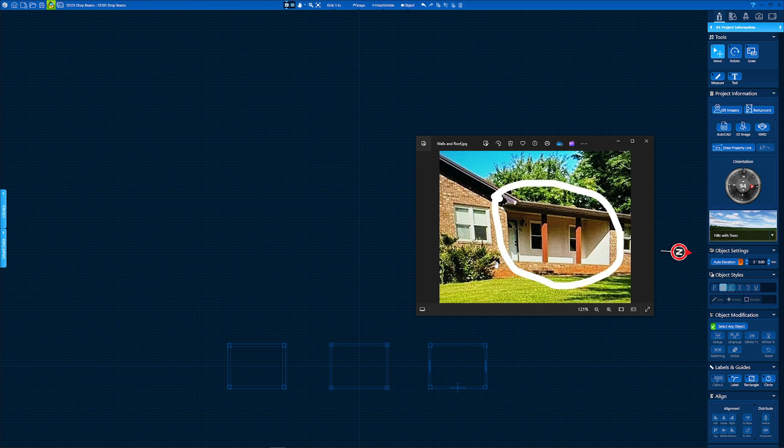So let's get started with this really quick, and I'll show you how to do this right now.

All right, first things first, we're going to set our grid up on a 1-inch grid for accuracy, always. Anything greater than 1 inch, you're really doing yourself a disservice and just creating more frustration for yourself. Our snaps are going to be set up since we're drawing straight lines in grid, relative angle, the L shortcut key, and autocomplete, which on mine is always on. If I'm drawing a house, everything's straight lines, so this is the only snap menu that I'm going to need. So we've got all that set up.

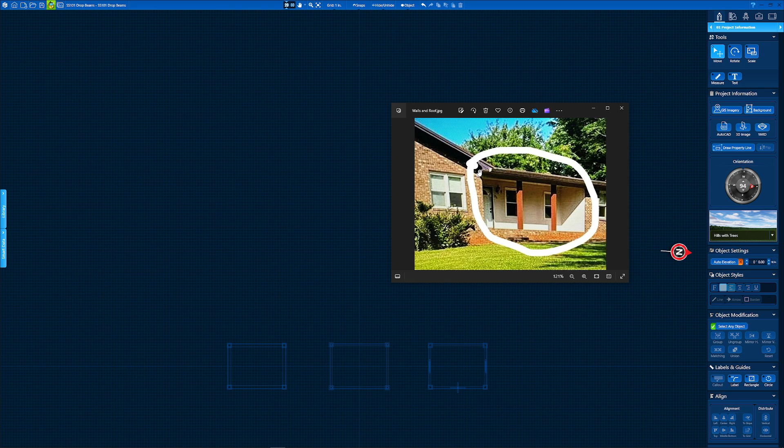So this is the only image that we have, so we're just going to make it up. Let's just say this is maybe 12, 7, 18. This might come out a little bit, so we're going to go 8 there. All right, let's do this. We're going to start here, go into the house stage, get started here, and zoom in on a spot. This is one of my other tutorials that I did.

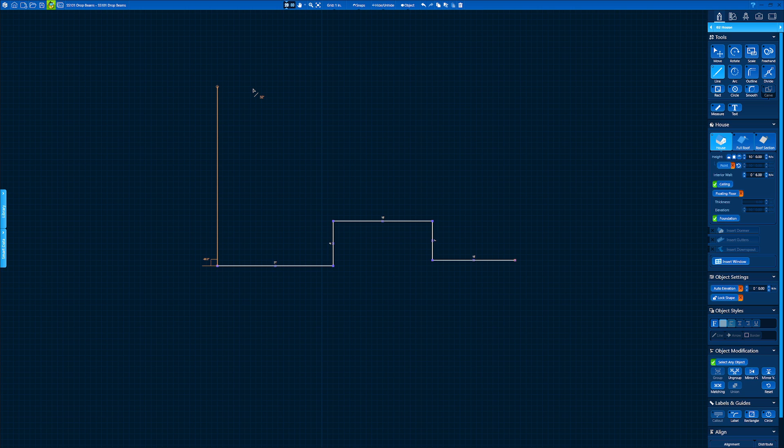A is the shortcut key for line, and we're going to start with, let's go 15. Type in 15, we're going to drop back 7, go over 18, let's go 8 on here. We're going to go over, let's say that gable's 21 feet, and this house is 40. And autocomplete: when you see the dotted dashed yellow line, just hit enter. Hit enter twice and it'll complete it for you.

So what you're looking at here is Structure Studios will, by default, add a roof to your walls. That's not what we want to do, because as you see, the porch notches back and there's a shot straight across to this gable here.

So this is why separating your roof from your walls is critical, even on a simple single story house like this. You don't have to overcomplicate it. Just always think separate roof from walls and then you're good to go. You'll be building these houses much faster, much more efficiently, and much more accurate if you think along those scales. So don't overcomplicate it, you're going to be okay.

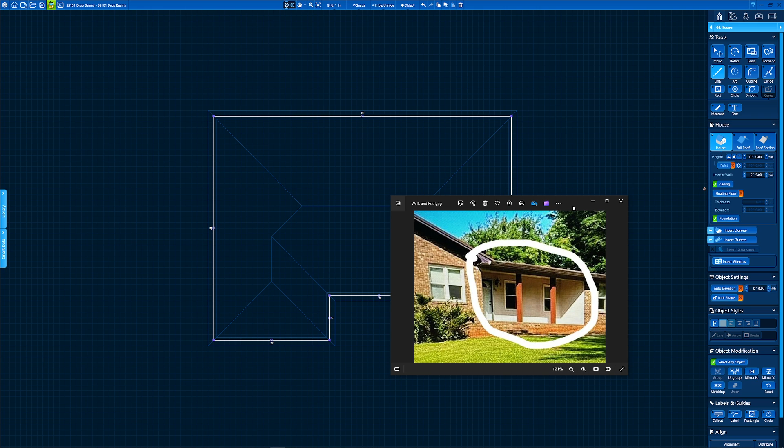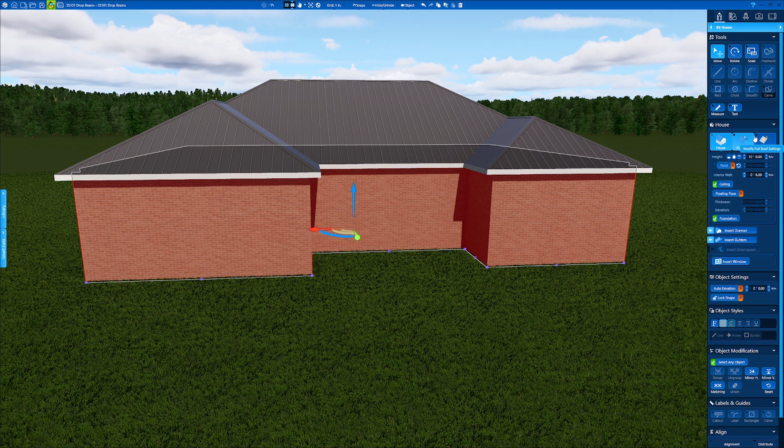So what I'm going to do is, if you go into the house stage, let's look at 3D here. This is what it's going to be. Obviously it's not correct, so what we're going to do is go into the house stage. I'm going to go to full roof, this tab here, modify full roof setting. Click that - notice a roof line will be checked. I'm going to uncheck that.

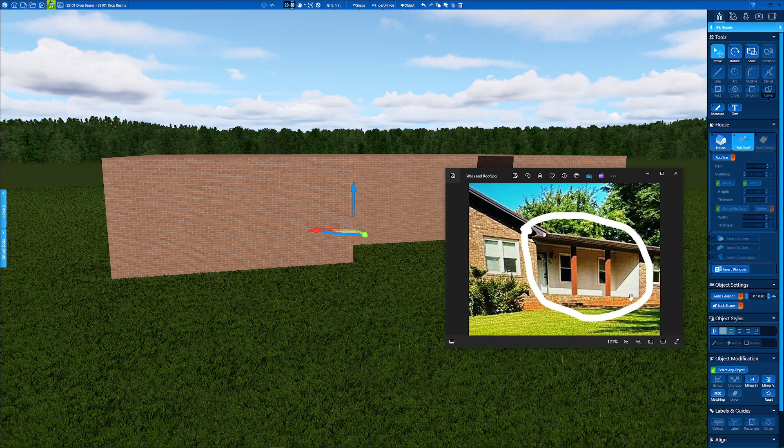In this house it looks like maybe a 24-inch porch that you step up, like 4 steps or something maybe. I can't really tell. We're going to make this 24 inches. So if these are 8-foot walls, 9, 10 - we're going to keep this at a 10 plate. And then we're going to put a 24-inch porch on this guy here.

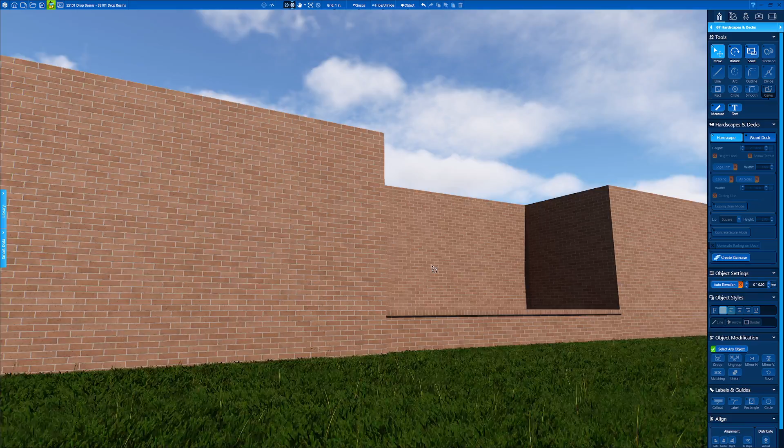Again, we're going to be working from the bottom up, and we're going to be working from the walls. So I'm going to go into hardscapes and decks, go back into 2D, just zoom in on a corner. For line, go here. I'm going to click D, shortcut key for the outline tool. I'm going to drag this all the way over just like this. Click that, and we're going to set this at 24 inches. So there we go, now we have our porch set up.

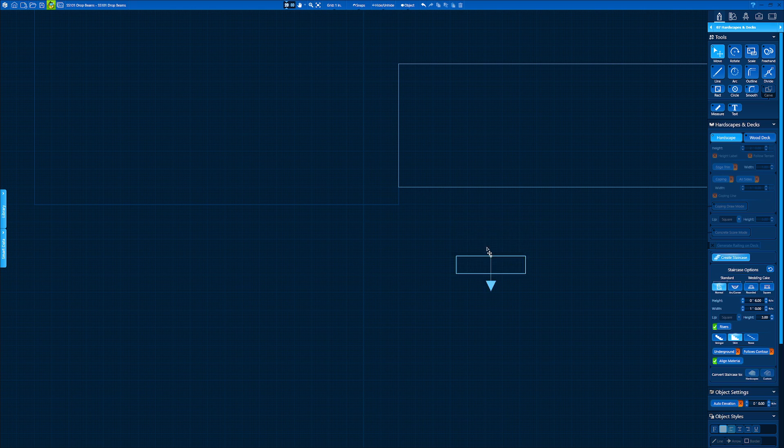And then you can add in your steps. I can't really see any steps, so maybe they're longer steps, I can't really tell from that image. So what I do a lot is create staircase - let's put a stairwell here. It's going to give us our 3 steps, we're going to come across. Let's make these steps like 6 feet.

Now watch this - so it's going to default with a 3-inch cap on a square like this right here. So our grass is pretty deep, that's why this doesn't give a full 6.

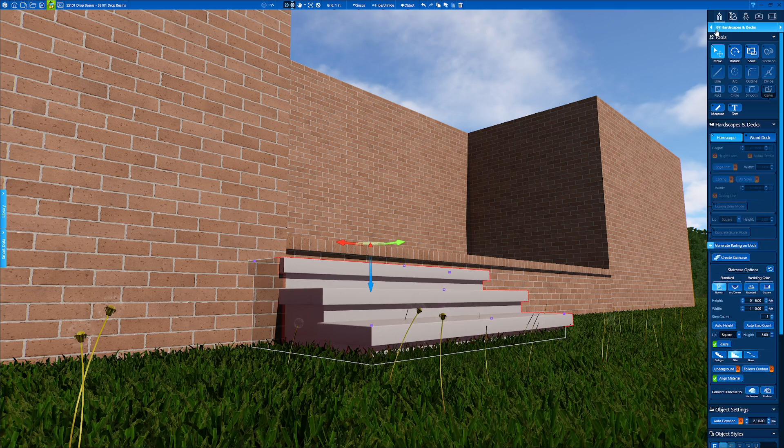So what I always do is, if you go to change the materials, let's just say we wanted all this to be brick. So it's going to highlight everything, be brick. Click the sides, brick, click here on the top, brick.

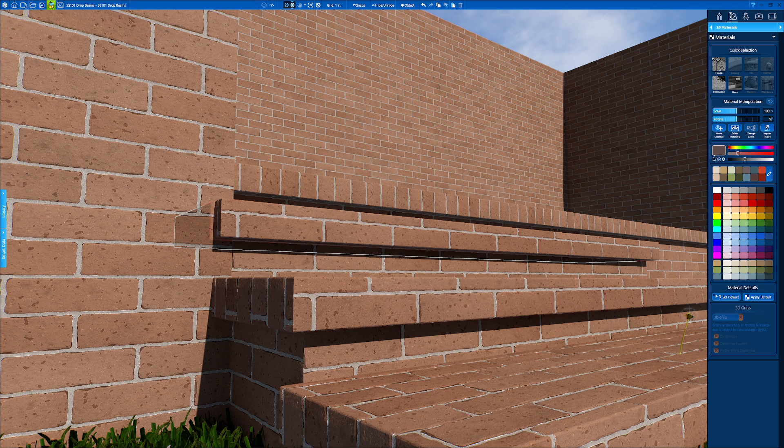And there we go. So what I like to do for my - you see this top soldier course here, see how it's nice and straight? So on your treads or your lips, turn them 90 degrees. Whoops. 90 degrees, let's see what just happened there. That's weird, so 90 - there we go.

So if you notice that it's not always going to be perfectly accurate here, you see these brick seams. This is a very simple fix - all we're going to do is grab our move material, our little hand right here, our pan selected material tool. Click that, and then we're just going to draw. See that? See how nice and clean that looks? So you don't have this weird grout line seam.

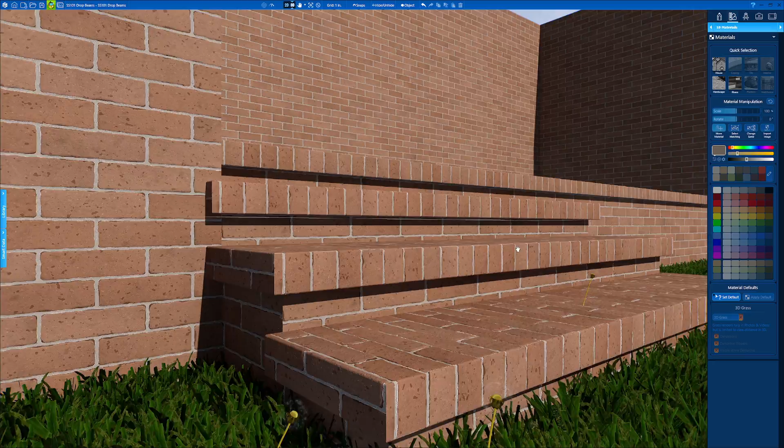So it's these little details like this that really give you the realistic look that everybody's looking for. It's not presentation settings, because the render quality of this program is at the top - it's these little tiny details like this right here. So just always make sure that you keep that in mind when you are working with this program.

So if you notice right here also, see how the program is just not going to put the material together properly. So when you adjust materials, you need to always look at these little things like this, because you might overlook them - these little details might not be that important to you, but clients will see this, and in my opinion these little things kind of say, well, he's not really that keen on details.

And I've been called out on this back in my early days of Structure Studios use. The client was like, oh, look at my brick, and I was like, oh - kind of made me feel like an idiot. So I just started paying attention to that.

So what I'm going to do - you see this line here, this is hardscapes and decks. I'm going to double click this line. I'm going to use my pan material again, and I'm just going to find that.

You can see that it's not 100% right. What I like to do is look for patterns in the brick, so I'll just scroll through here. I'm looking for this pattern right here, this little dot. And we're just going to keep scrolling. There it is, right there. So now I know this is on this course here, this brick. And so I'm just going to find out.

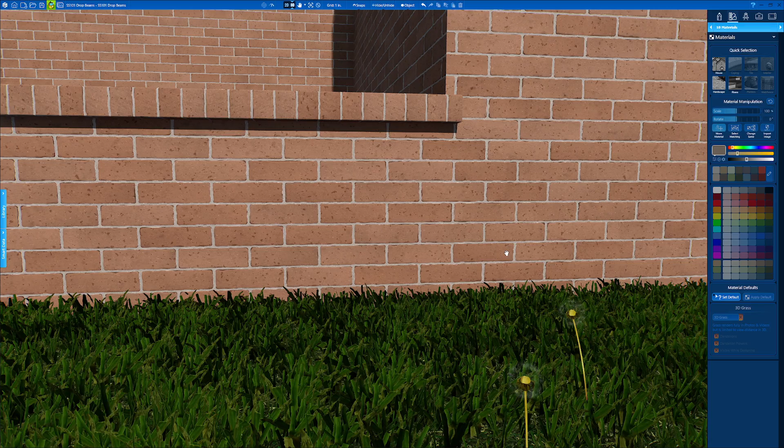Watch that line disappear. See that? And it just disappears. So now you have a nice seamless transition to the house, and it's not all weird. You're not going to get called out. Now, if you do all change same or something like that, this is going to change again.

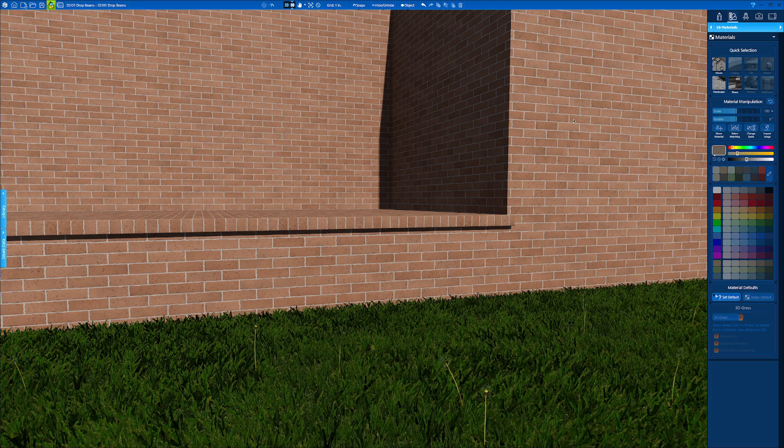So when I talk about manipulating materials, this is the material manipulation that I'm talking about. Just making sure that everything's lined up, especially on shingles, like when we get up on the roof, you got a really complex roof line. You're going to have to match up those shingles so you don't see the different sections in your 3D model.

Especially if you're charging any type of money to build models, if you're at that advanced stage and you're not paying attention to these little details, and you ship your model out, or you're doing renderings for someone, that's just not a good look. Take a little more pride in your work. Put in a little bit more effort. Take the extra 15, 20 seconds to adjust your materials.

Make sure everything's nice and smooth. So when you take that photo or you're posting to social media, everything's in place and everything's where it should be. So always just put in just that little bit of effort, just a little bit of time that's going to make your stuff stand out and be better than everybody else's.

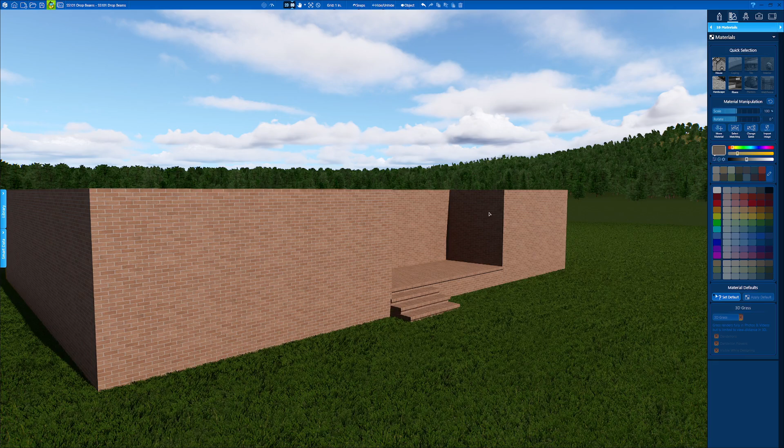So it's not like it's going to take you an hour to move that material around. Just move it around. Take some pride in your work. Put in some more effort. Look for these little things like this, and it doesn't take long to fix. So, a quick tip on material manipulation for you.

It also works like on the copy paste stuff. So if you're copying and pasting from the material stage and you made all these material adjustments, that's what I'm talking about for the materials. If I did this and copied and pasted into some other face, all the materials are going to be out of whack again.

So if you have tons of material manipulations like that brick right there, or the roof shingles, or column posts, or wood grains, or anything like that, Structure Studios is not going to retain all that information. You're going to have to go back and do all that again if you don't copy paste from the proper stage. So just to give you a little heads up on that.

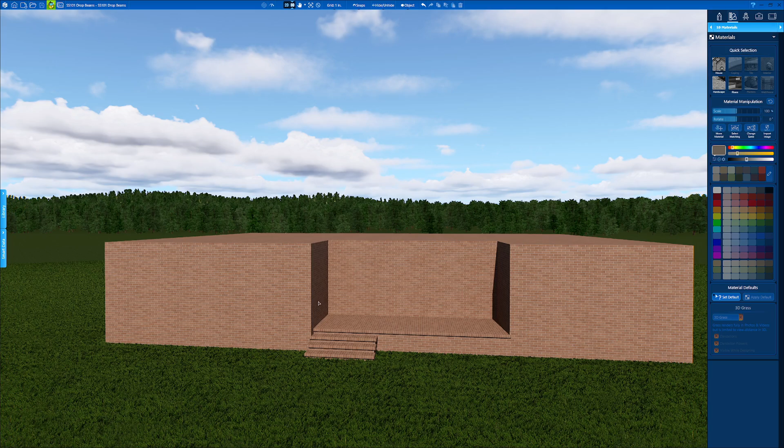We've had that discussion before. That's the reason I do not copy paste from the material stage or from the project information stage. I do a lot of material manipulation. That's what I'm talking about, a lot.

So you got a big house, man, you've matched up materials, everything's perfect. Window sills and headers or 90-degree angles on it, and then you copy paste from the wrong... all that's on large houses, 25,000 square feet. I mean, like big giant houses, large properties.

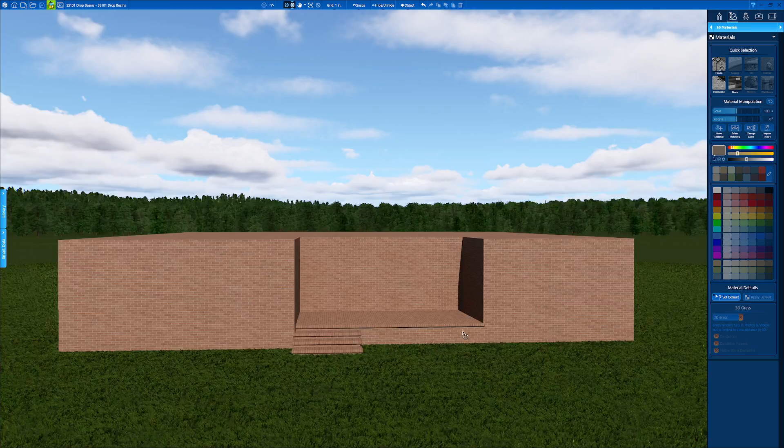There's a lot of material manipulation going on, and it does, when you get on a big giant property like that, I mean, I'll probably spend a good solid 45 minutes just adjusting materials, just to get all that, exactly, just like we did the brick here, to get everything perfect so you don't see those seams where all the pieces come together. So if you've seen any of my work, everything's, you're just like, well how's that one piece? Well, it's not one piece.

It's probably 4 pieces, but I spend the time to adjust my materials where it all looks seamless. So just a quick tip for you there.

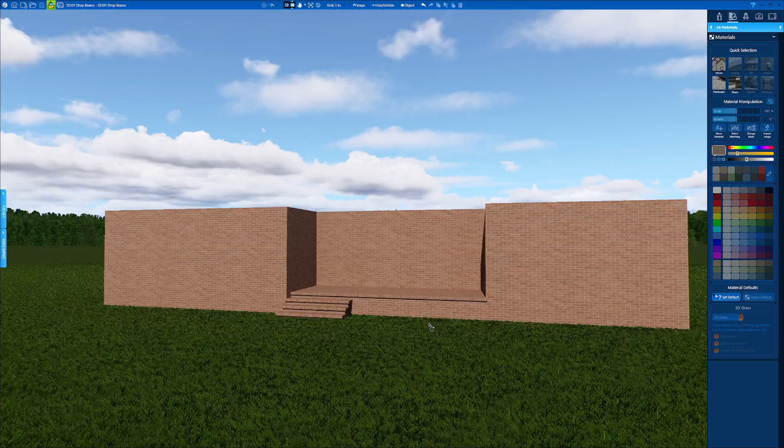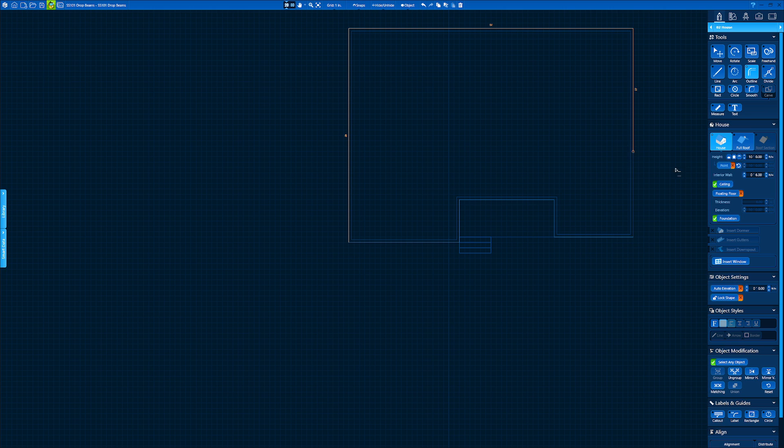Let's get back to this, back to the house stage. So this guy here, and we're going to add this roof. What I'm going to do is hit the shortcut key for the outline tool. I usually get on a corner on the outside and snap it, then go around this way, stop right here, click and end that line. I'll pick it back up from there while it's still highlighted.

A for my line tool again. I'm going to go right back over to here, click, and then it's going to show the blue dash line, and I can just hit enter for autocomplete. So now since it retained this last bit of information right here, I've got 2 blocks that are the same.

So if you go into your house stage, on your height you have single story, which is default 10. Always be mindful of your plate height. This one right here is an 8, but it's a plus 2 for the porch. Plate heights are very important, especially if you're attaching structures to it.

If you don't change your plate height—let's just say it's an older home just like this, it has an 8-foot plate height, and then you attach a structure to it and it's 10 feet, and then you go to price your 10-foot structure and it's really only 8, that's going to add a lot more cost to the overall build.

So plate heights are very important. Don't just assume it's 10 feet default and everything's 10 feet default. Be mindful and aware of your plate heights, especially if you're attaching arbors, cabanas, shingle roof structures, or porches to your house, because it's going to skew your numbers on your estimate. A couple thousand to three thousand dollars of extra material that you really don't need—because you had it as a 10 when it should have been an 8—could be the difference between losing the project and winning it. So always be accurate with your models and your designs, especially.

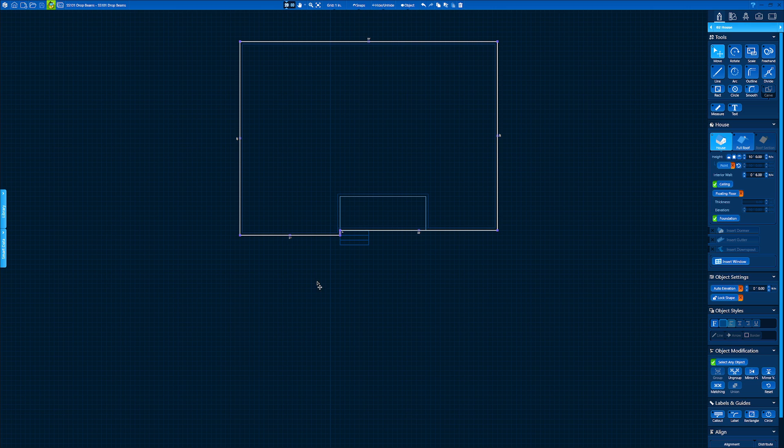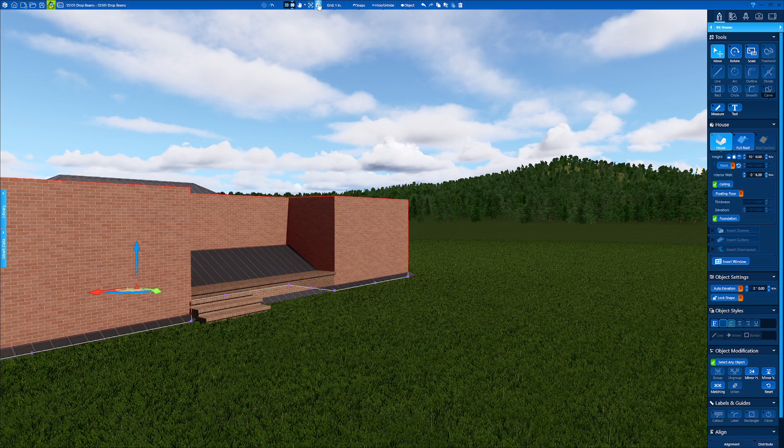So we're going to save this. Default height is 10, roof second story is 20. What we're going to be looking for is a set height of roof only, just like this. I know this is a 10 because we're up 2 and it's an 8 plate, so this is plus 2. This is a 10, so therefore my plate height here is 8. So I'm going to grab this and set it at 10. And there you have it.

So the open porch is notched out, it's in 2 pieces, walls plus roof. But if you notice, these older homes usually have low pitches—I've seen them as low as 3. These older homes, like 80s builds, have an 8-foot plate with like a 3 or 4 pitch. So we're going to play around with the pitch of this roof right here.

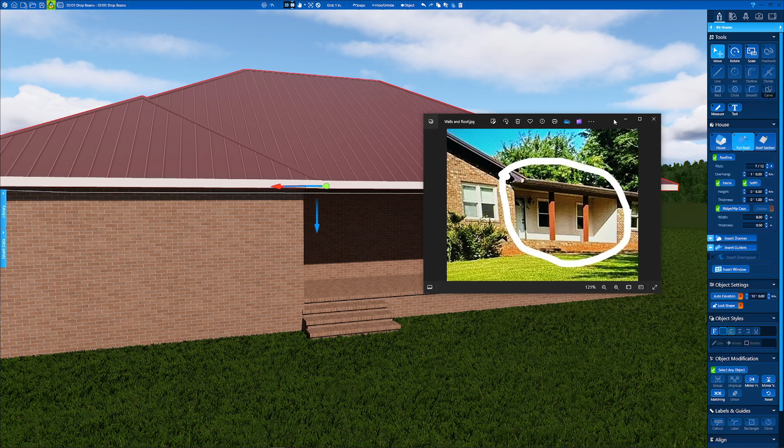While the roof is still highlighted, I'm just going to drop this down to like a 4. Then we're going to click and highlight—see the white highlight here? On this section, I'm going to go to my roof section and change this to gable. Oh no, look, there's a hole. What am I to do?

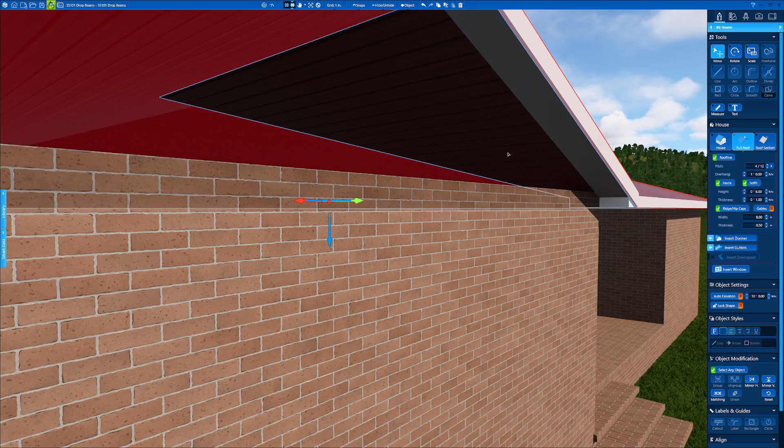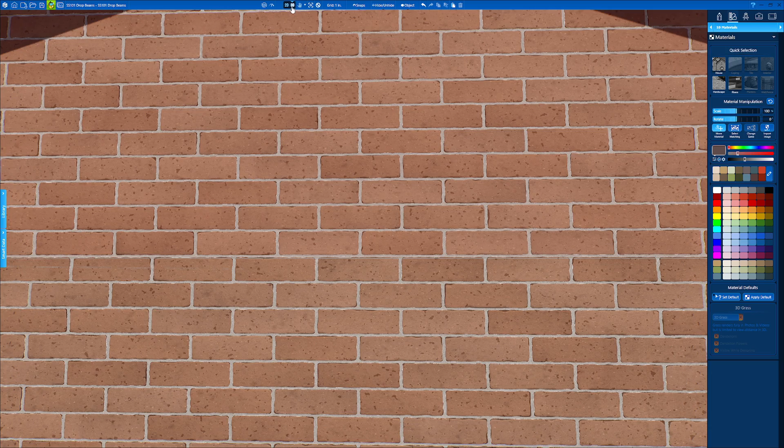House tab, add 1 inch, and there you have it. Oh man, but look at my brick—it's stacked. What am I going to do about that? Well, back in the material stage, you double click just this section here, and all I'm going to do is roll this over to the side to get that offset. So move material, and I'm going to come straight over just like this. Problem solved—it took 2 seconds to do that, and it doesn't look all weird and stuff.

So we're going to go back here. So I've got—what is this?

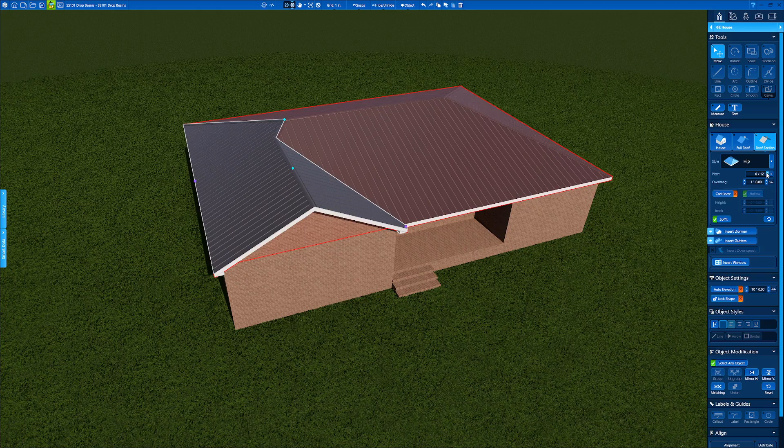I'm going to leave this like a 4 or a 3 in the center, but turn my sides up a little higher because I want my gable to be a 5. I'm going to leave this lower. If I wanted to change this and this, I would highlight this section with a white line highlight, hold control and click this section, so I can do these 2 sections and make it a 6. And there we go.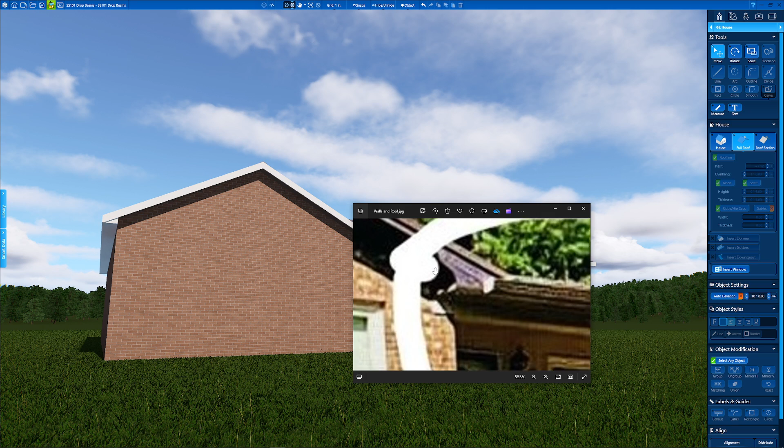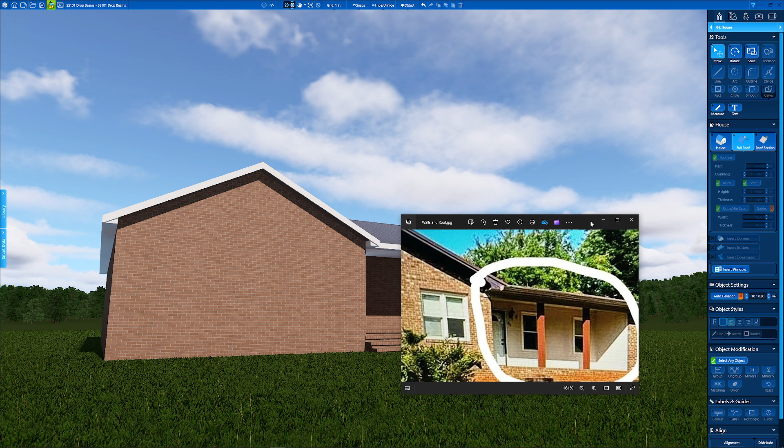If you wanted to do that detail on these older homes like this, these single stories, with me talking, the video is going 18 minutes so far. But if I'm just doing this, bang, bang, bang, I'm going to build this entire house in 15 minutes. But yeah, I'm doing a lot of talking.

Let's just do this little detail right here, and I'll show you some quick tips. In one of the updates, they did take out - see, they do a 1-inch notch back on the box soffits.

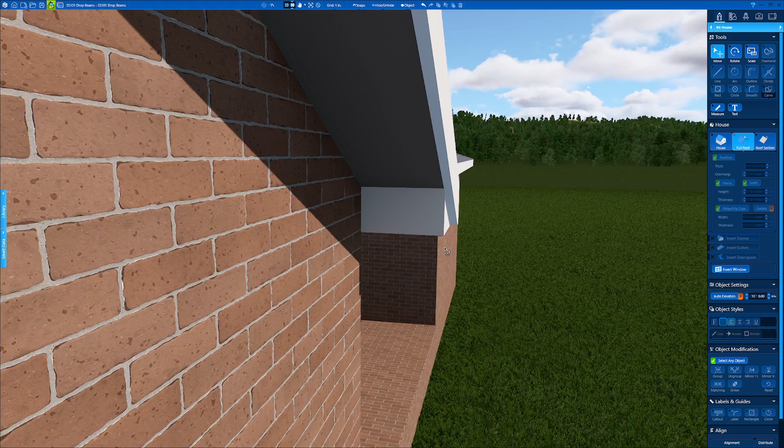In the cheaper homes, they will put the fascia right on top of the box, but in your more high-end homes, they're going to be more flush, like a flush box soffit. That's the way the program used to be, and then they changed it.

So what they need to do is make it where we can adjust the soffit to be flush, or if we wanted it recessed, we could do that too. But they need to change that. Let me see if... see, it still leaves a 1/2 inch or a 1/4 inch. Even when you do adjust, they won't let you go to 0.

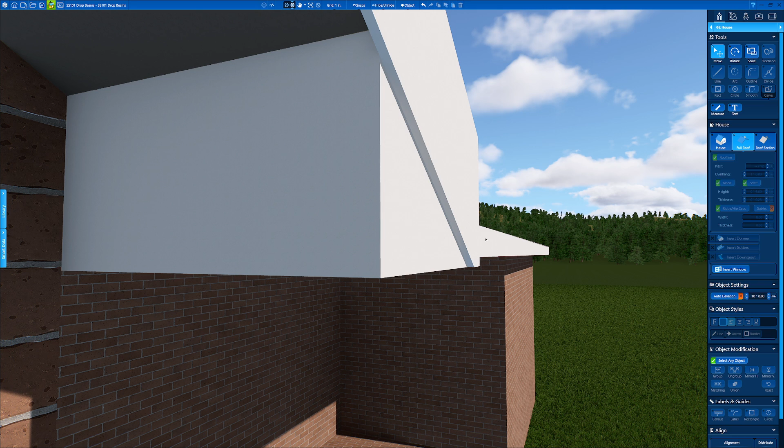That's what I'm talking about. You need to be able to turn this to 0. But you see, it changes the fascia. There's no controls for the soffit, it's just the fascia. Usually fascia is going to be 3/4 of an inch.

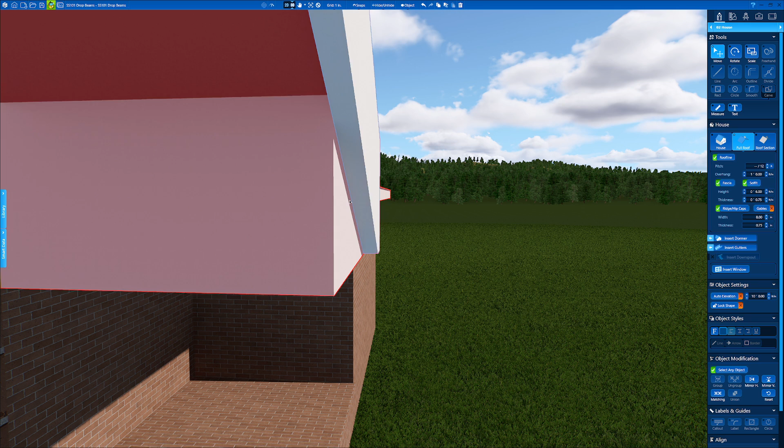Yeah, nothing, these are all ridge cap stuff. There needs to be a section for the soffit also, so that we can adjust this soffit. So if I wanted this flush, I could get the box soffits flush instead of having this weird notch back like this.

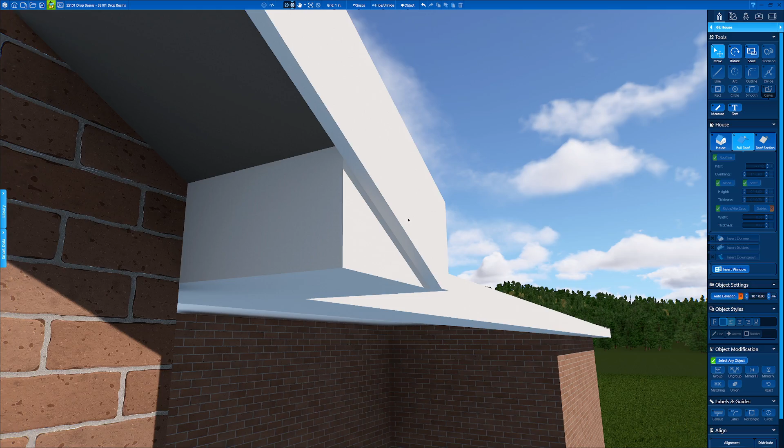For older homes, like cheaper, more of your development style homes, you're going to see the fascia over the box soffit because it's easier and cheaper to do it that way. It takes a little more skill to cut out the actual box soffit and then caulk and paint it. So a lot of the builders we have these days will do it like this. But on your higher end homes, you're gonna be more of a solid box soffit.

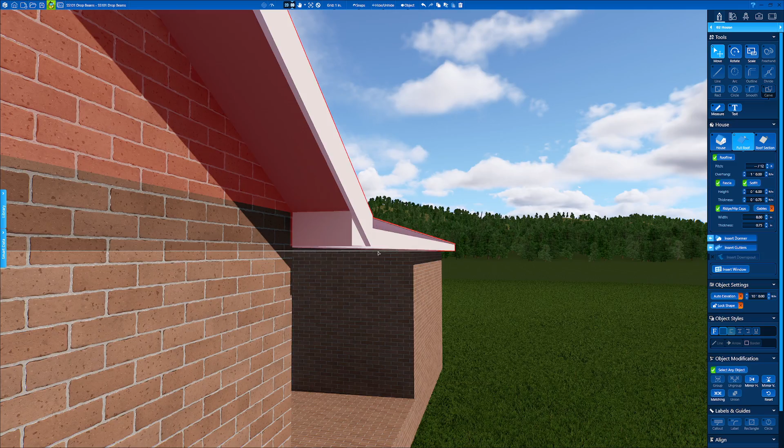So we need that option in the soffit. We have the fascia, we can adjust that - great. But we need to be able to adjust this soffit too. So Structure Studios, if you are watching, these are the things we need. We don't need more plants and birds and characters, we need performance upgrades like this.

So that is that. Let's go back in the material stage. We're gonna take this underside - Control C that material, Control V material there. Here we go. All right, let's get back to it here.

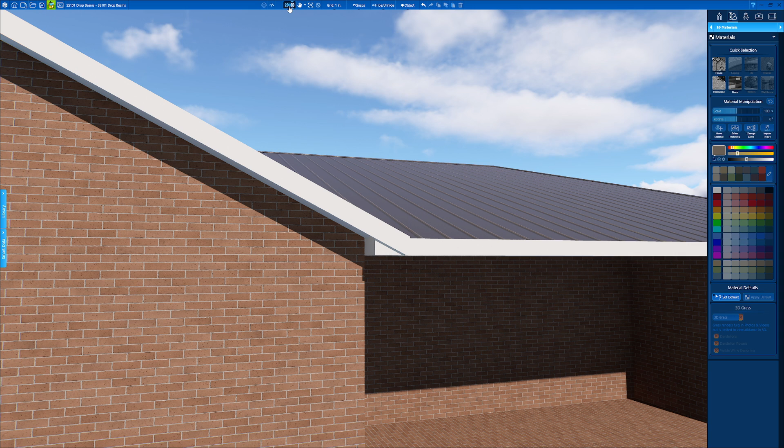I'm gonna build this out of custom shapes, and so we're gonna do this. I'm just gonna make this video, and it's a little more intricate here. I know this box soffit is 12s, so I'm gonna go 12, and then we're gonna do a little curve here.

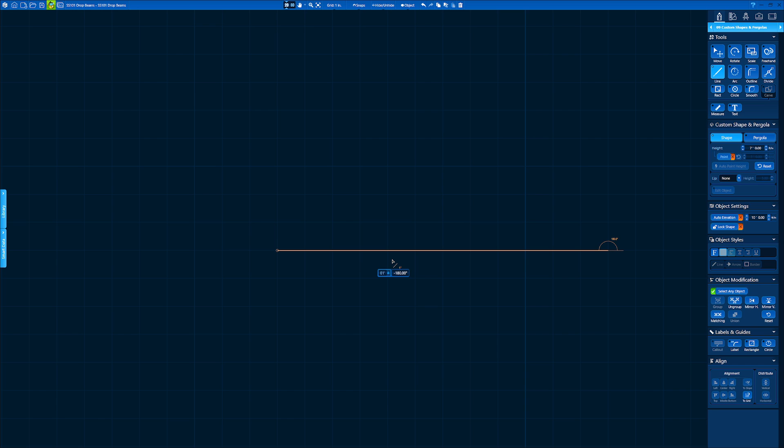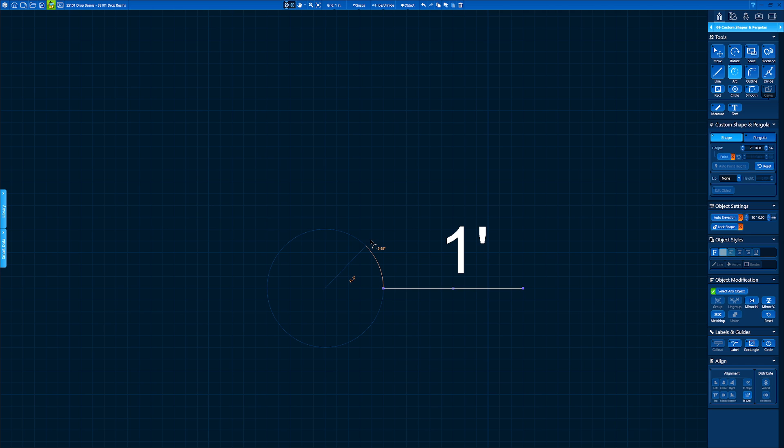In custom shapes, I'm gonna go one - oops, one - and then we're gonna do kind of almost like a recurve type of shape here. I'm gonna turn my relative angle off with the L shortcut key, so I can get a little more of something like this. It looks like it kind of straightens out, so let's do kind of like that.

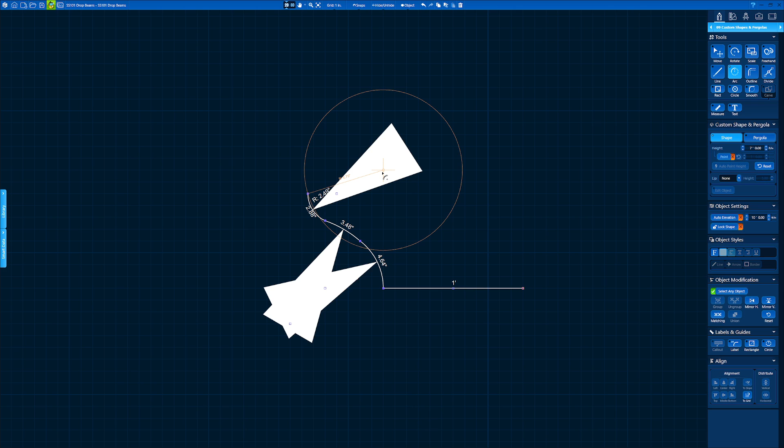I'm gonna roll it back up like this. Oh man, this is a mess. Look at this font - and you can't control the arrow size either for the curves, which is very frustrating. See, you get these gigantic arrows, you can't control the size of those things, man. It's just outrageous.

Whoever's making the decisions over there just needs to stop making decisions. So we're gonna go like this. It looks like a 5. I'm just gonna guess this angle here, and we're gonna go something like this right here. I'm gonna go that. You can turn all this off. It's what I usually do when I get down on detail stuff like this.

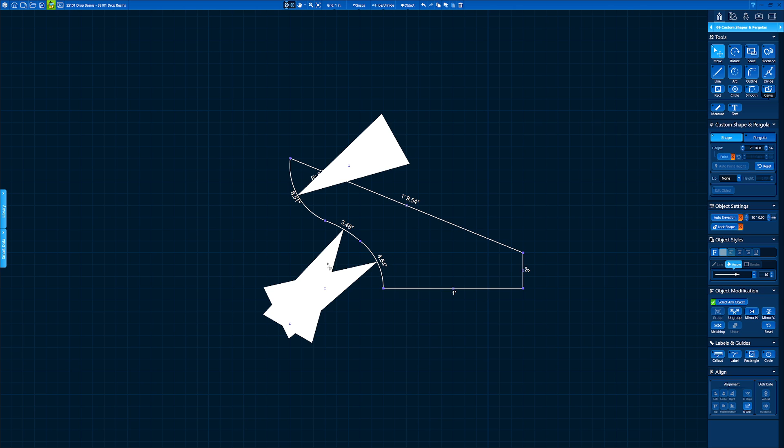Wait a minute, let's see. Oh, they did change it. They finally added that in there. Look at that, so hey, good on them. They must be watching my videos.

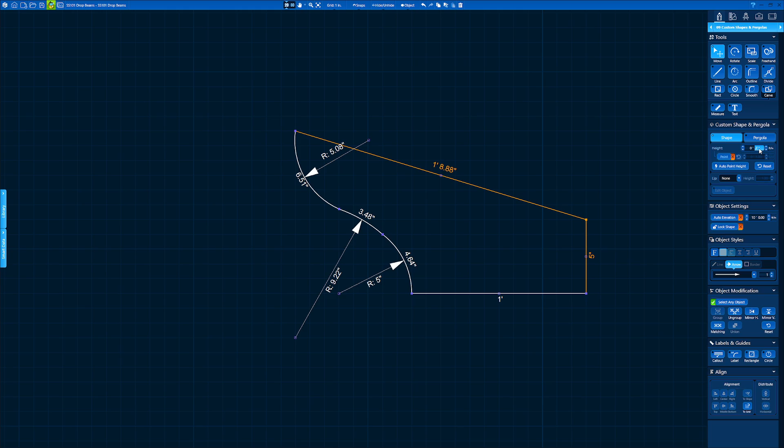So I'm going to go here. Let me see, maybe this is a little bit higher, 4 or 5 inches. Something like this. Make sure you change that. I think we're at 3/4 here, so we're going to go 0.75. And then we have our little piece, and it's in a different material color, so let's see.

Now we're going to double click this guy. Hit the W shortcut key to rotate. L to turn my relative angle back on, the L shortcut key, and I'm just going to bloop bloop, just like this. I almost got the pitch.

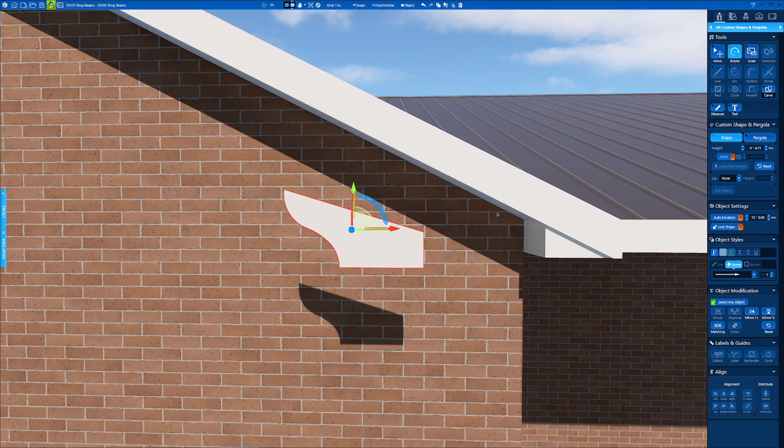Now I need to rotate this back down on my gizmo. This Y needs to be going back up, or Z. So I want to hit the W shortcut, and you see the blue box. Click that blue box, it's going to reset the orientation. So now I can drag this guy over here like this.

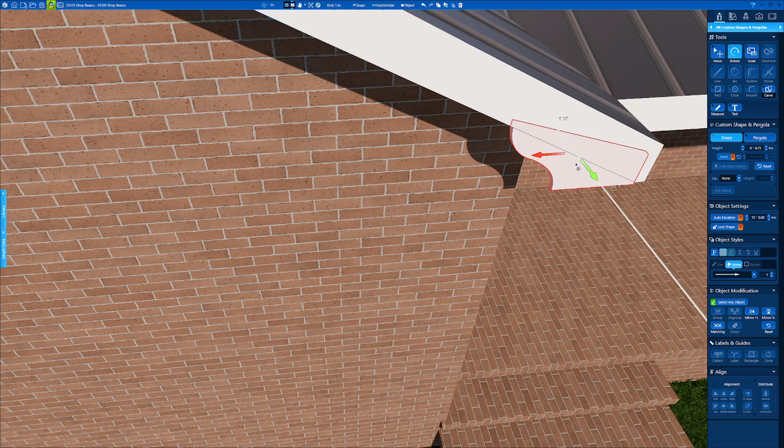And I'm going to snug this guy up just like that right there. And we're going to go. No, we're going to come down. I'm going to manually, there we go. There we go, so now you have that cool little

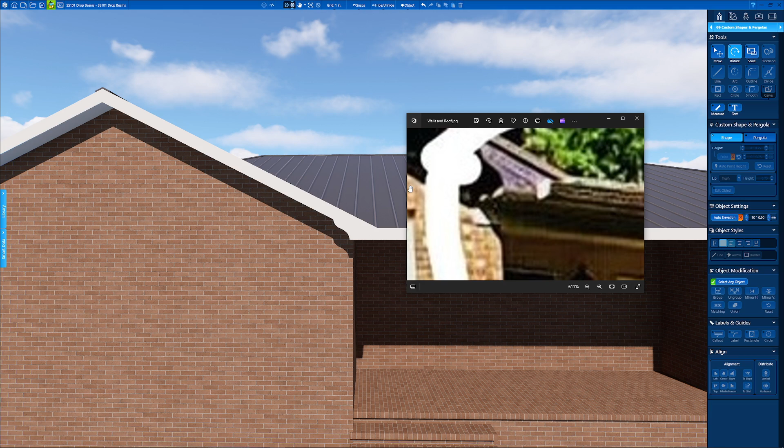detail, and these things, they don't take very long. So we have that, and if I want to take this guy, I want to go back and see how much I'm snapped. So I got to go to my hide unhide. I got to turn on my 2D roofing to make sure that my line is there. You see how I'm kind of off.

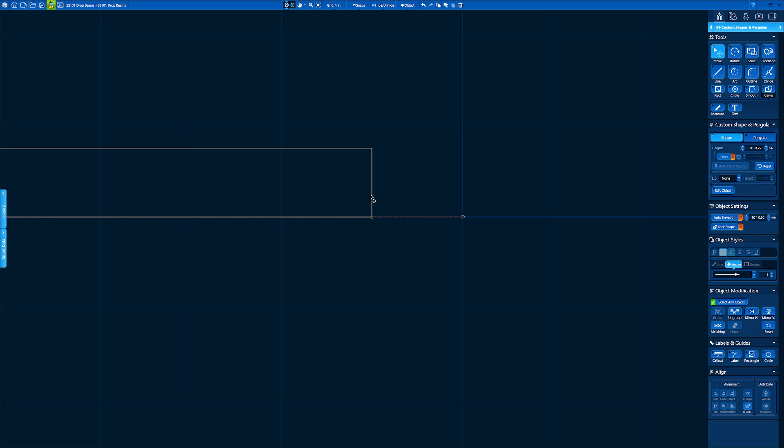So if I have my snaps on point and line, I'm going to turn my grid off, and then I'm going to try to snap it just like that. So now I'm completely flush, let me go 1 inch back. It's not going to snap. Look at that, oh, I got to turn my grid on. So turn my grid on.

And it's still not going to snap. So fun stuff, fun stuff. Yeah, we're just gonna just eyeball it. So 1 inch in.

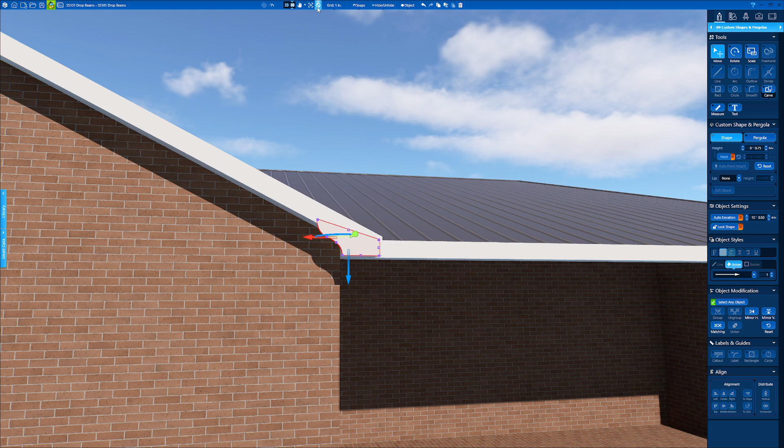So now I'm going to take this, I'm going to copy paste to the other side once you have that one built, and I'm going to drag it out here. And I'm going to use my mirror, I'm just going to click it. Watch this, boop, and now I'm just going to snap it 1 inch off the corner.

Hit the Q shortcut key or escape, whichever one, I usually use Q, and snaps. There we go. And we're back in business. Look at that, see, very fast.

Very simple. As long as you're using your snaps and your grid, that's the way the program was intended to be used, you're going to be okay, and you can do cool little things like this and make sure everything is nice and seamless, so you don't have those issues.

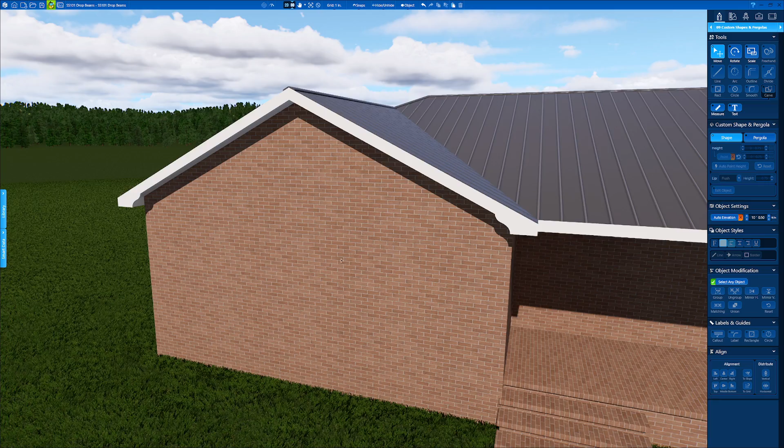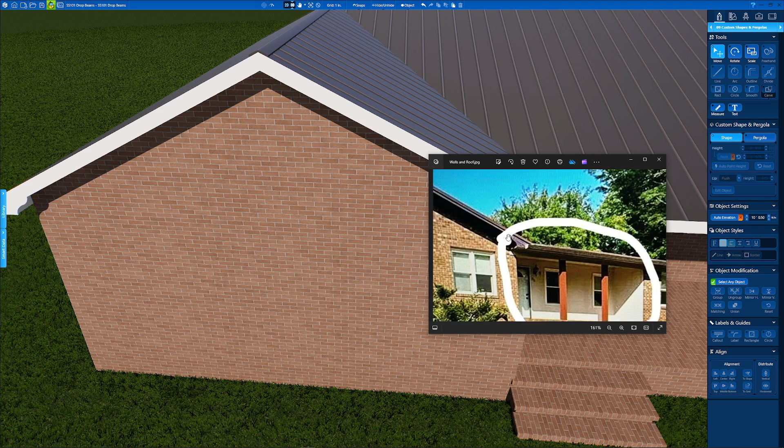But if you also notice, this is something else I've been trying to get Structure Studios to do, is drip edge. So we got the ridge cap, yeah, that's all fine and good, but we need this drip edge, and I'll show you that right here. So if you notice, it's a 2.5 inch drip edge. That's going to be on there, but we don't have that.

See, these little details like that, it really gives that the detail that you need. So yeah, that's what I'm trying to get them to do that. Just gives a little more detail, and looks a little more real.

I do a lot of house models for a lot of like custom home builders, and they do want things like really fast. Hey, my client really needs to see this house. I'm like, well, I'm not going to spend 3 days to build and model all the detail in SketchUp, so let me bang this out for you in Structure Studios in 3 hours. And these little things like this, like drip edge, would be huge to have in the house stage.

But most importantly for Structure Studios right now, the only thing they need to focus on is performance, because it's very, very slow and it's just continual lag and drag. It's very tough. So performance—let's get the performance up. It's like nothing else, we don't need anything else. Just focus on performance.

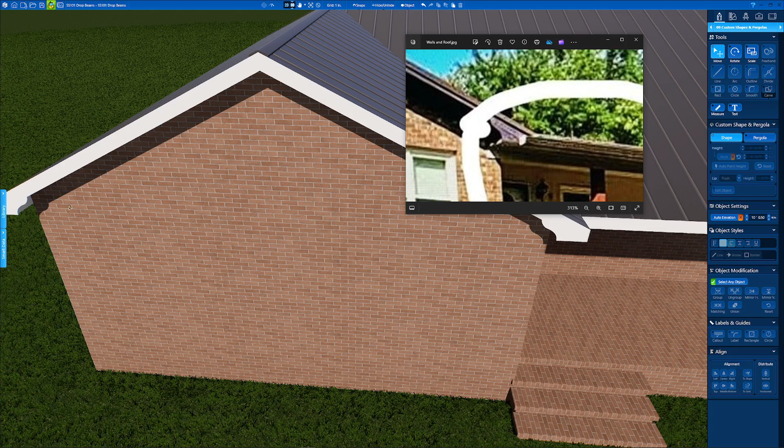So again, here's some little details for you guys very quickly on that. So that's pretty much it. We're going to get back to the house itself. Let's do some posts real quick.

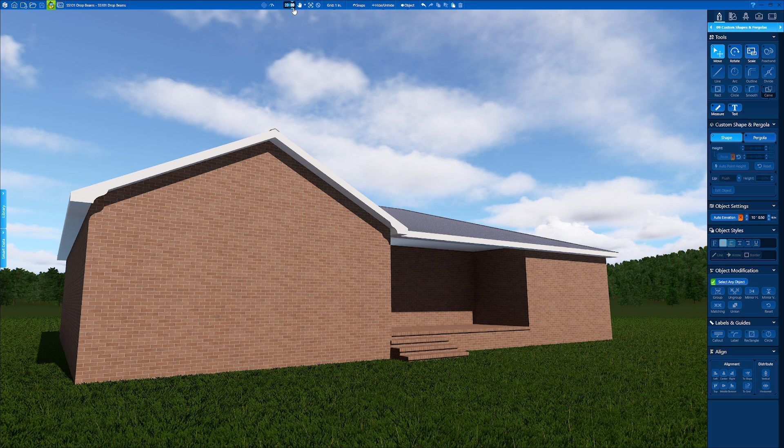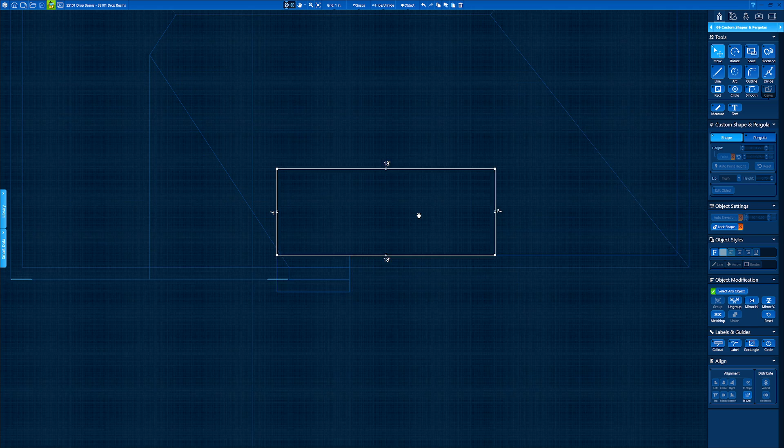So we're going to put a post here, 8x8. So we're up 10—remember, we're only up 2. So an 8-foot plate. I'm going to copy and paste another guy right over here, and we're just going to eyeball this. There we go.

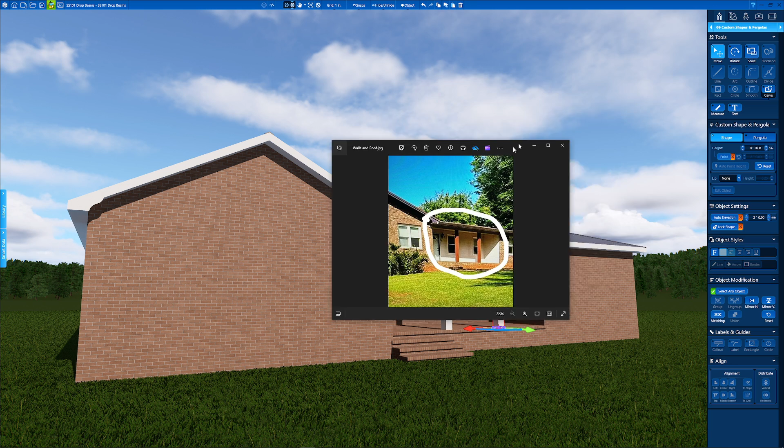So starting to take shape. Now we've got a drop beam here, and this is one of the other little details I'm talking about. It's not going to take long to do. But this drop beam here, this is not the way this house is going to be constructed in real life. There's a drop beam, so I'm going to do that in custom shapes also.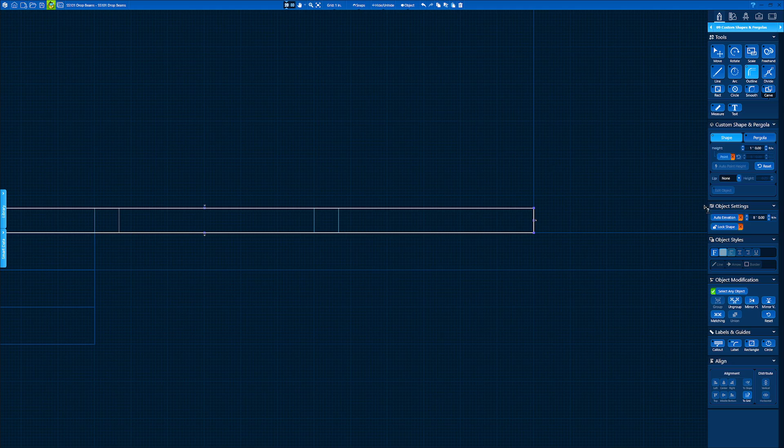Basically all you're going to do is get back on your porch line, go all the way across, click D, the shortcut key for the outline tool, click, and I'm going to set this to like a 1, set it to an 8. There we go, I'm going to go up. There we go, so we've got our drop beam. That little detail like that goes a long way when you're building.

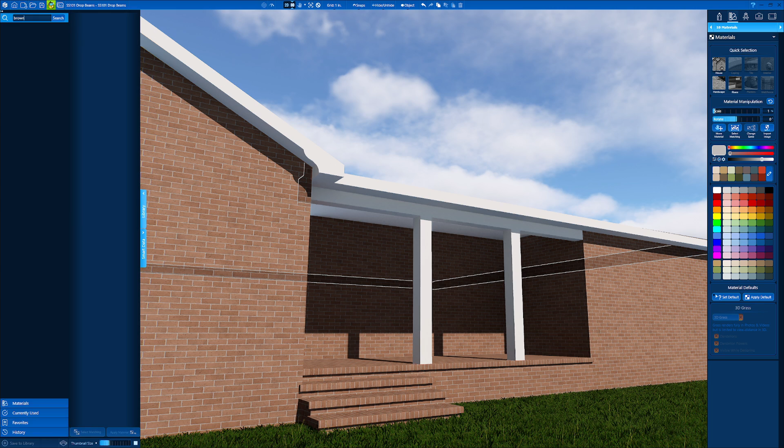It's like a brown, so let's change it. Let's go to material stage. I'm going to click this white and select matching, because I'm going to do this all at once. Now I'm going to go over to my material stage, and I'm just going to type in brown. Brown. And acrylic—I don't want it shiny.

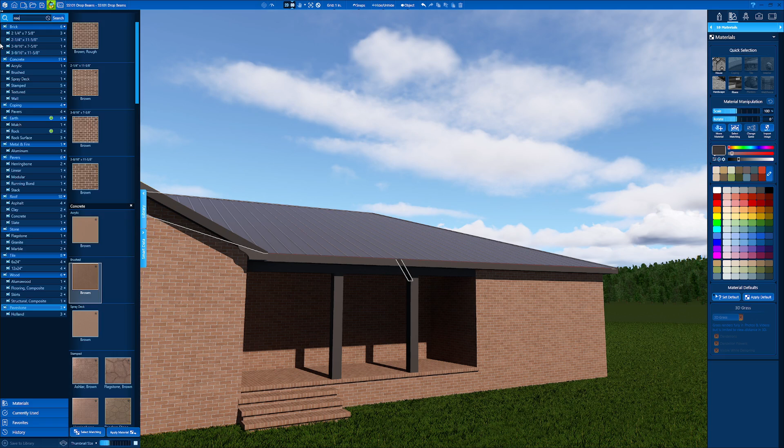Spray deck, let's do this. There we go, close it. That's a little too brown, like a little older looking. And let's change our roof also—type in roof, we'll grab like a 3 tab. There we go, so now we're cooking.

And get back over to here, let's see what that looks like. Here's our house, so let's change these to like, I don't know, like a cedar. So what I'm going to do is, if you want like a solid wood board like plywood, type in structural—it's going to pull up all the plywoods. So I use these a lot for stuff like this.

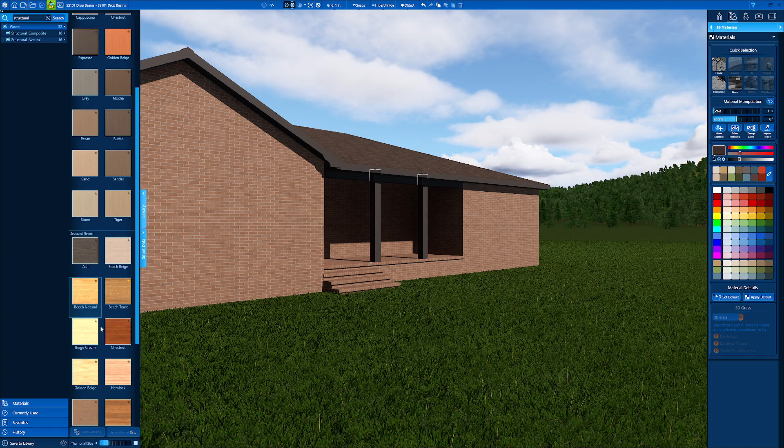Let's do some red cedar here, and I'm just going to kind of do like this right here. So you see how there's the pattern? See the pattern is there? Turn this down a little bit—they're really orange, so make that really orange. There we go. Oh, I see there's also siding up in there, so we'll change that. Okay, so you see this pattern? See the knots here? I don't like that.

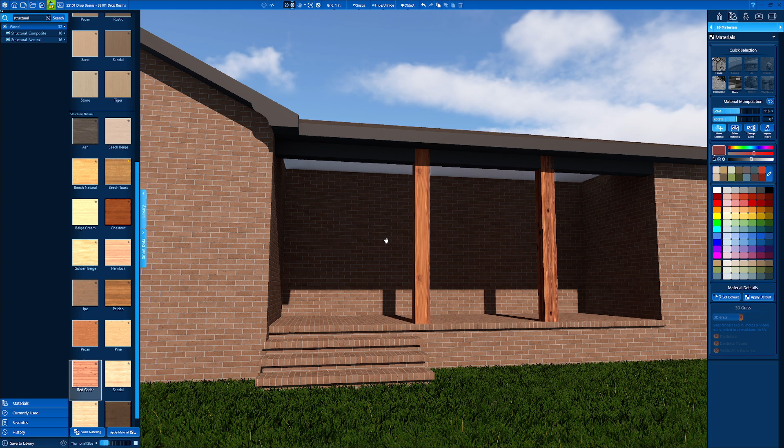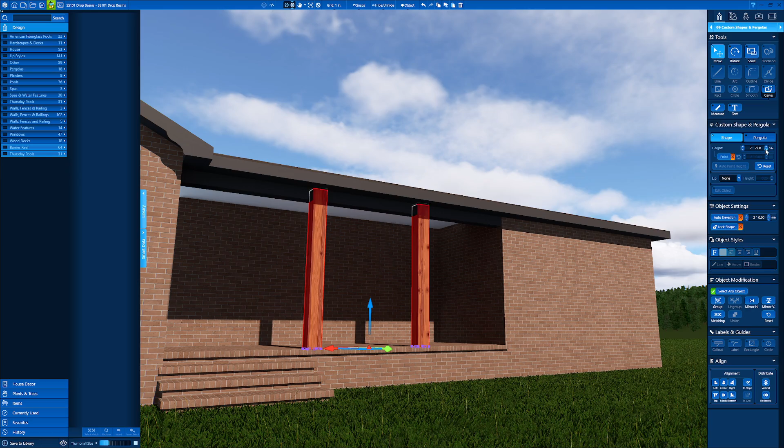So what I do is double click this post, hit the move tool, the pan, and just give it a spin, kind of look for something that I like. So let's do something like that. And I'm going to change this one also because I don't like that one—that's like an eyeball, I'm going to do some more knots like that, a little more of a natural look. But you've got a little Z-fighting up here, so let's drop these down. There we go, like that.

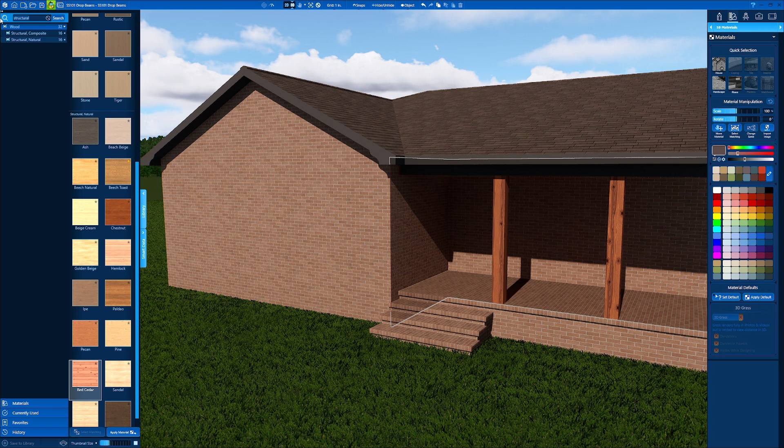Now there's some siding under here, so what I'm going to do is double click the walls, back in material stage. Double click this wall, I'm going to hold control and click all the walls that I want to change to siding. And then I'm going to come in here and just type in siding, and then grab something—you know, their siding really sucks. I'm going to do like a white, I don't like that either, like a wood.

Yeah, that'll work. It's too large. It's like an 85, there we go. There we go, so there we are.

And that's it. So little things like this, your drop beams, your post, lining up your materials. So like this right here, I really don't like that edge brick like that, but that one is what it is.

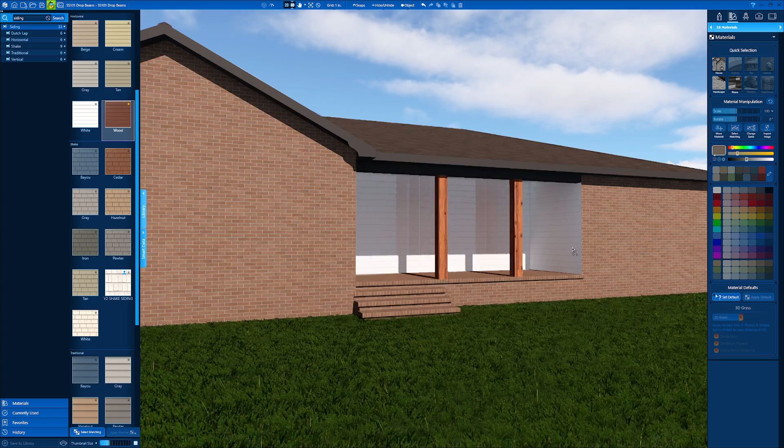These little details, like your little box soffit details, material manipulation here, material manipulation over here on your walls, right here. Just these little things are going to give you a nice look to your models, and it's really going to go along with this. What it's going to do is set your work apart from everybody else who doesn't spend the time to do these things.

So, 'well, I'm not designing houses' - those are the words of somebody who's just going to put in minimal effort for everything they do. Put in the extra few minutes, it's not like it's going to take hours and days. Again, this is a very simple, basic, rudimentary program. You don't have to overcomplicate it. This program will get complicated and you'll get frustrated when you complicate things. You can't think about it in very technical and complex thought processes. Think of it very simple.

It's a very simple program, just like this right here. These little things, the box soffit details, the drop beams, it doesn't take long at all. It's like I'm rambling about these things, but it's all important. These things are important, the little things are important. They don't take a lot of time. You guys can do it. Separate yourself from the rest of the herd.

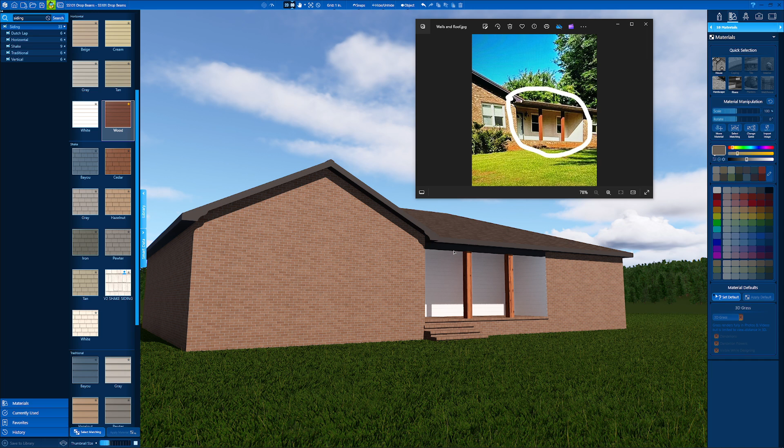Make that emotional connection with your clients. Connect them to the space with your model work visually, and you have a foot in the door to win the project over the other guy who's not going to spend the extra 30 minutes on these little details like this. So spend the time on little details, they'll go a long way.